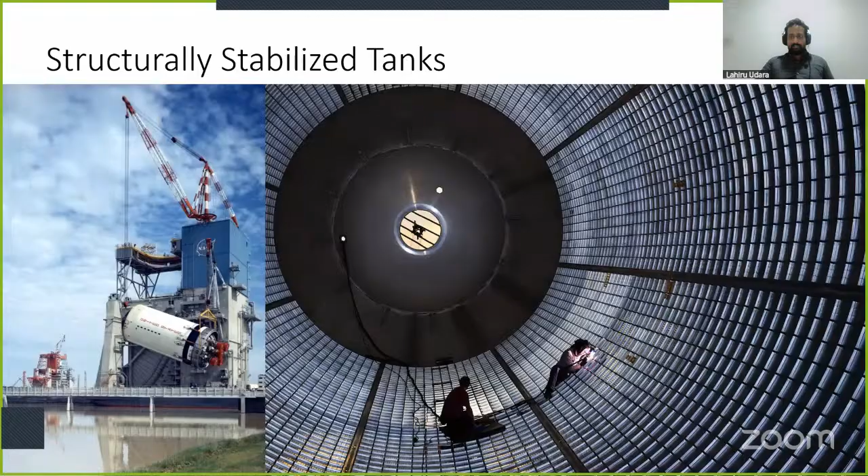When it comes to tanks, there are two main types. The first one is called the structurally stabilized tank. This means the structure of the rocket is strong enough to hold the entire tank. You might wonder, if the tank cannot hold itself together, wouldn't it collapse on itself? Yeah, it happens. That's why it is structurally stabilized.

This means the inner side of the tank is made in a way to increase its strength. For example, this rocket stage has these square, rectangular shaped components cut out from the skin, so it has this orthogrid structure - this is called the orthogrid. And that gives the strength for the tank.

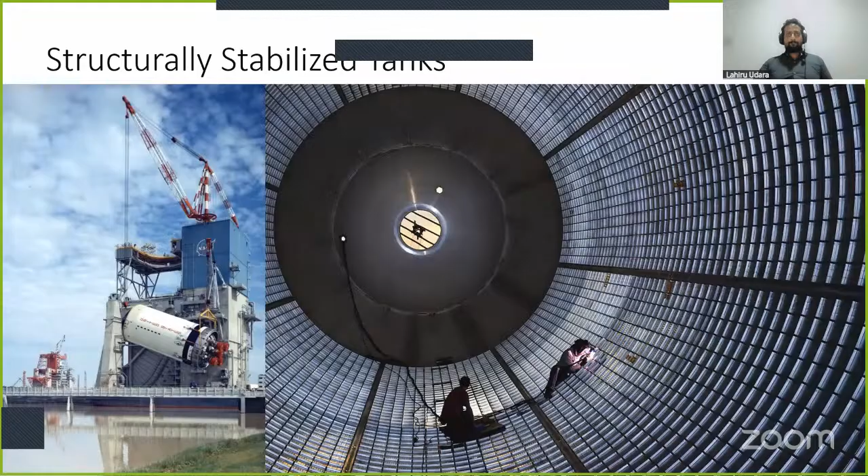The other type is called the pressure stabilized tank, which means the structure of the tank is not strong enough to hold the tank together. So that means if these tanks are not pressurized, they will collapse.

So yeah, that's what happens if you lose the internal pressure on a pressure stabilized tank.

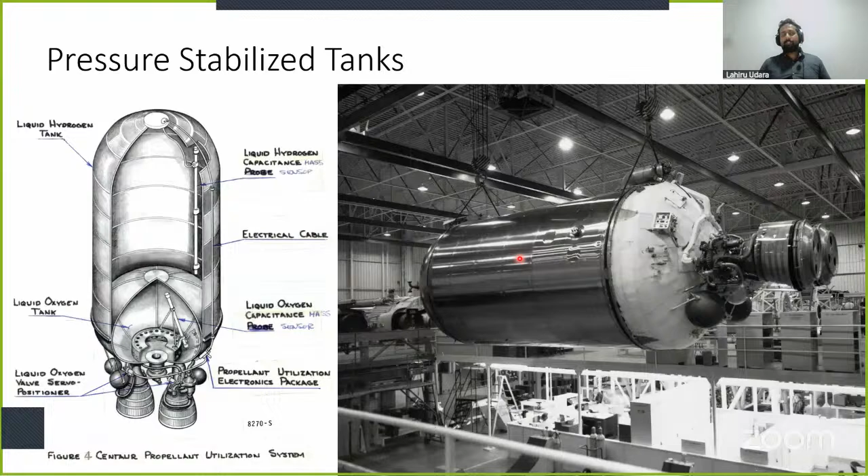So one of the clever tricks is this: you just take a very thin sheet of metal and make a tank out of that sheet. So this is basically a sheet metal tank. It's very thin, so it doesn't have enough strength to hold itself together, and you need to pressurize it to make it like a balloon. So these are called balloon tanks, because if you pump air into a balloon, it can lift something up, but if you remove the pressure, it just collapses on itself.

So both of these tanks are used on rockets. Then there's tank pressurization. Pressurization is crucial for pressure stabilized tanks, but structurally stabilized tanks also need tank pressurization. That is because before launch, the rocket tanks are basically filled with propellants.

But as you go up, the level of propellants reduces. That means initially you had higher pressure for the engines, like the liquid pressure is proportional to the height of the liquid. So when the tank is full, you have a lot of pressure at the bottom of the tank, which means you have a high inlet pressure for the rocket engine.

As the level of the propellant goes down, the pressure reduces. That is not good because you need to maintain a constant pressure for the rocket engine inlet. So to keep up with the loss of propellant, you need to increase the pressure above the liquid, using a gas like helium, which is non-reactive. You pump helium to the top of the tank as the propellant level goes down, so in that way you can keep almost constant pressure near the engine inlet.

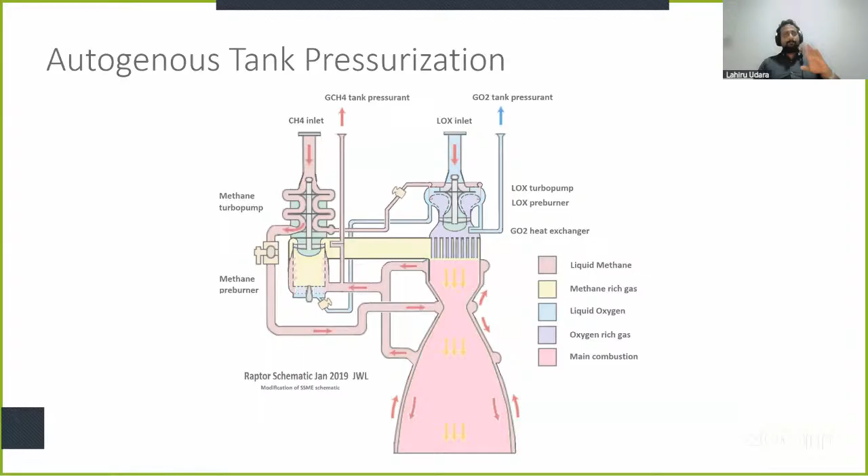Imagine the rocket is going to space. The first stage engine was shut down and removed. Now it's time to ignite the second stage engine, but now you are floating in space, so the liquid just floats inside the tank. You cannot start the engine because you don't have liquid at the inlet of the rocket engine. If you start it that way, you're not getting liquid into the tank, so your pumps rotate at a much higher speed and will just explode. This is not good.

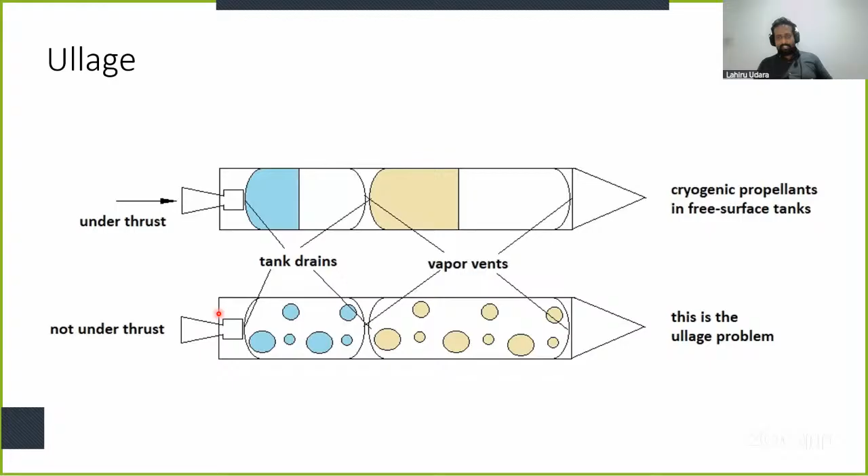You need to get these liquid bubbles back into the bottom of the tank. So how do you do that? You need small rocket engines called ullage thrusters - this process is known as ullage. Ullage thrusters, basically small rocket engines, just fire, giving a small acceleration, which pushes those liquid bubbles back into the bottom of the tank. Now you can start the rocket engine.

If you watch a rocket launch, let's say a SpaceX Falcon 9 launch, you can clearly see these ullage thrusters are fired just before the ignition of the second stage. You can watch a video on YouTube and you'll see that.

Now, multi-stage rockets. Modern rockets have multiple stages. The reason is that you can remove weight as you go up, so it will be much more efficient. Otherwise, if you are doing a single stage rocket from the ground all the way to orbit, it has to be a very big rocket. But you can do a multi-stage rocket and carry that same payload in a much smaller rocket. So this is a weight efficient method.

This is a Delta II rocket. It has the first stage with 9 rocket boosters, then the second stage and the third stage, and the payload here, which is the Kepler Space Telescope.

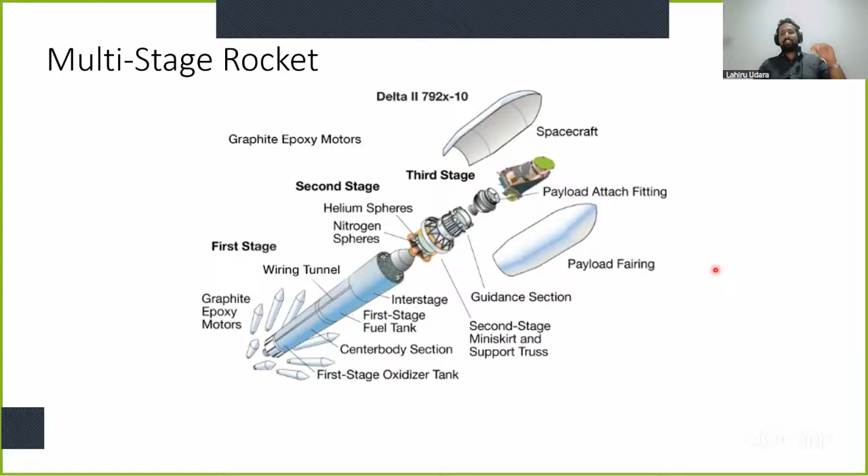Now we are going to talk about how a rocket is manufactured. We are diving into a rocket manufacturing facility. Everything starts with metal sheets - these are aluminum sheets. Most rockets are made out of aluminum alloys. The main reason is aluminum is very lightweight and has good strength.

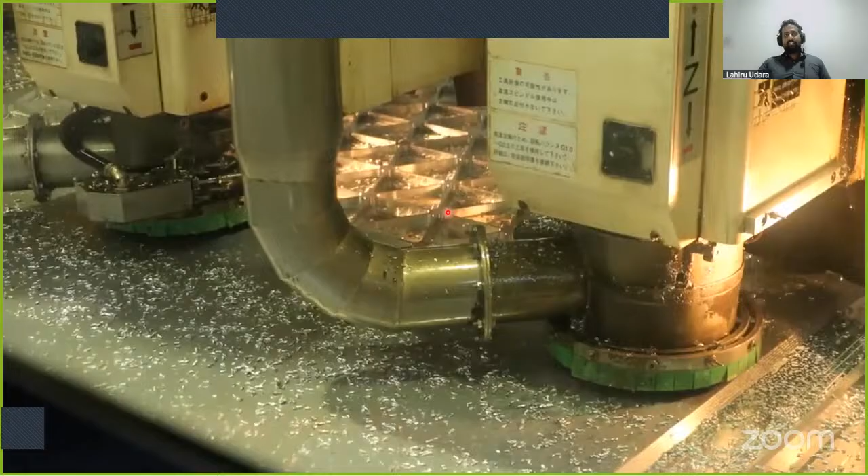Relative to its weight. But you cannot take this bulky metal sheet for the rocket - you need to cut down some weight. To do that, you take a milling machine and start to cut different shapes. Earlier we saw a rocket with rectangular cuts, called orthogrid. Here you can see triangular cuts - the center parts are milled away. This is called a milling machine. It's basically a kind of drilling machine, but the purpose is not to drill a hole, it just moves around, removing the material.

By doing this, you can reduce your weight by a large margin while keeping most of its strength. That's why most rockets have this kind of milling pattern. This is called the isogrid. The previous rectangular blocks are called the orthogrids. So these two patterns are used when manufacturing a rocket tank.

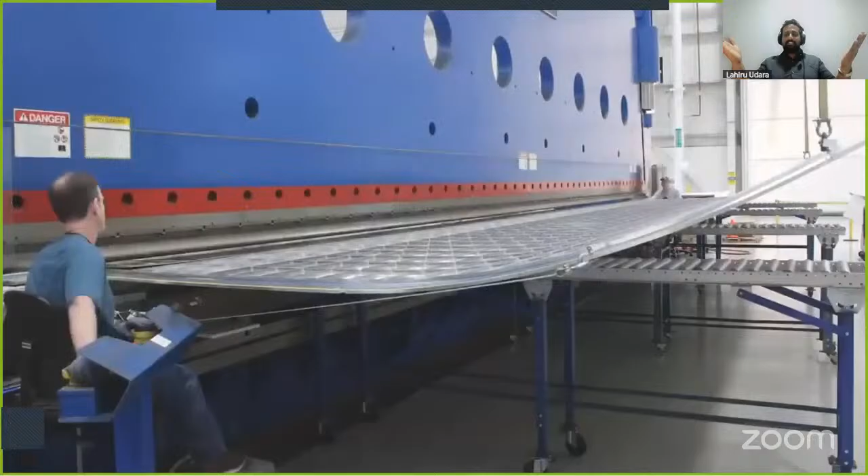Then we have this - you can see the milling part is done. Next thing is you need to bend this long sheet into a curve, because you need to attach multiple curved sheets to make a cylinder. So these are the welded lines.

Most modern day rocket manufacturers use friction stir welding to weld these parts to make a barrel. These are called barrels. To get the appropriate height, you can attach multiple cylinder barrels to get the appropriate height of the rocket stage.

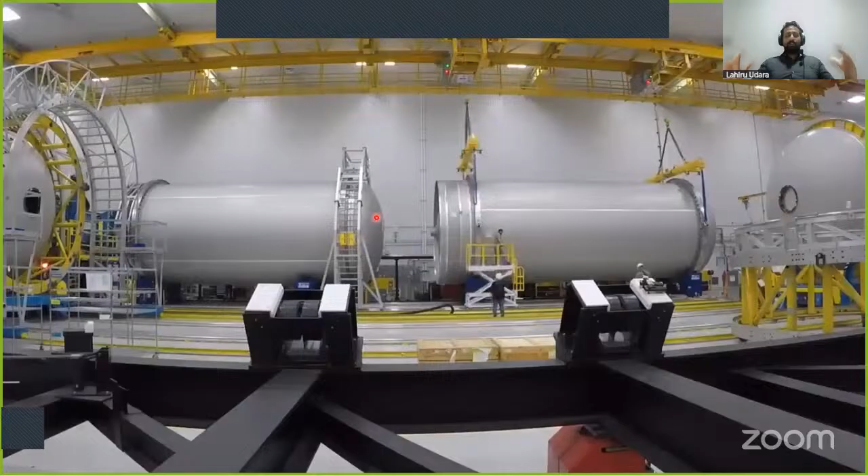Here we have two completed tanks. Then you have to attach these two tanks to make the whole stage. After that, you need to attach rocket engines, electrical wirings, computers, and all these other components.

Then you have to send these to the launch pad, because most of the time rockets are not manufactured near the launch pad. There are multiple reasons for that, but for transporting, we have multiple methods. One method is you can use a big ship and use the ocean or any waterway to transport these big rocket stages.

The reason for that is the maximum size for anything allowed to be transported through roads in America. So Falcon 9 was manufactured keeping that idea in mind, so we don't need big ships or aircraft to transport our rockets. In order to transport these on the main roads, we need to limit the size of the rocket to 3.7 meters - that is the diameter of the Falcon 9 rocket.

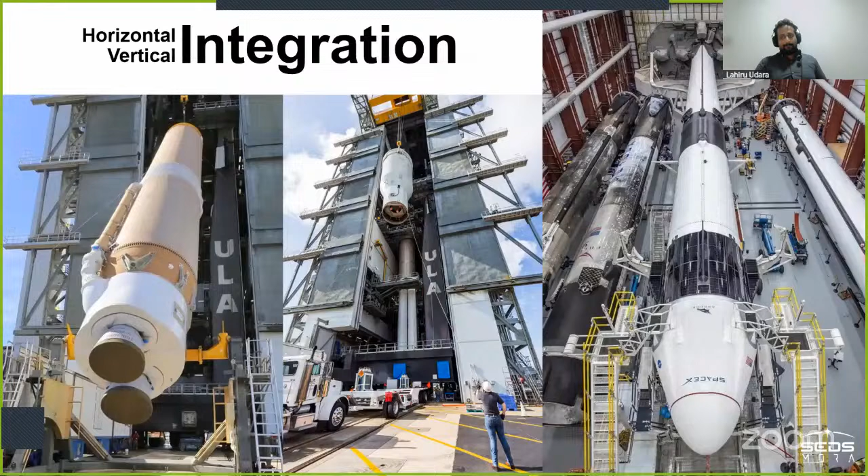Once all the stages are delivered to the launch pad, next thing is called integration. There are two methods: one is horizontal integration, the other is vertical integration. These things explain themselves - horizontal integration means you are assembling the rocket in a horizontal way, and vertical integration means you are assembling the rocket in a vertical way.

So that's basically it. This is the Falcon integration facility. You can see 4 first stages here, and this one has been integrated with the second stage and the Dragon spacecraft onto the launch platform. Here you can see the launch platform.

And here ULA, United Launch Alliance Company, used vertical integration. The first stage, you can see, has been transported onto the launch platform here. Then the second stage is hoisted and placed on top of that.

Then the payload. One of the main reasons is some payloads cannot be integrated horizontally, like a very delicate thing such as a space telescope. If you are using horizontal integration, you have to transport it to the launch pad in a horizontal way, then raise it up and turn it 90 degrees. Some delicate instruments on a space telescope might not be designed to withstand that, so in these cases vertical integration is the best - that's why the 2 companies use 2 different methods.

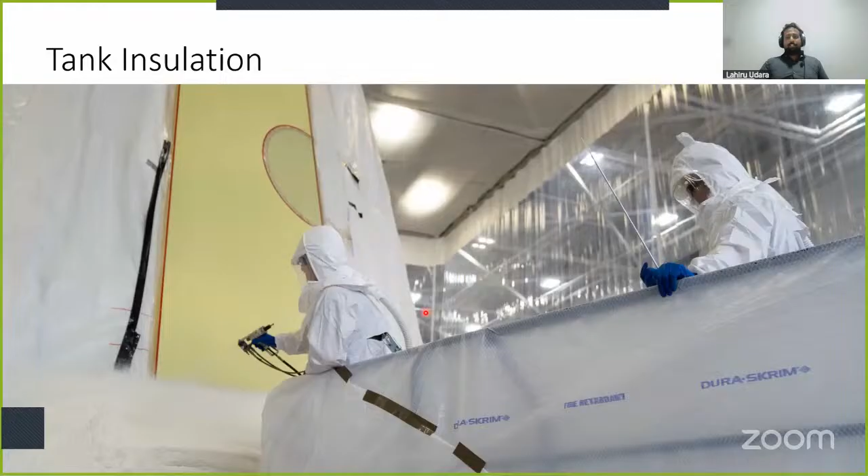Another thing I need to mention about tanks is the insulation of the tank. Most rockets use cryogenic propellants, meaning these liquids are gases at room temperature. For example, liquid oxygen is used as an oxidizer, but oxygen is a gas at room temperature. You need to cool it down to minus 183 degrees Celsius to make it a liquid. But once you fill that cold liquid into a tank, the outside of the rocket is at normal environment temperature. The heat will come into the tank and start to vaporize that liquid again. So to prevent that, you need to add thermal insulation around the rocket tanks.

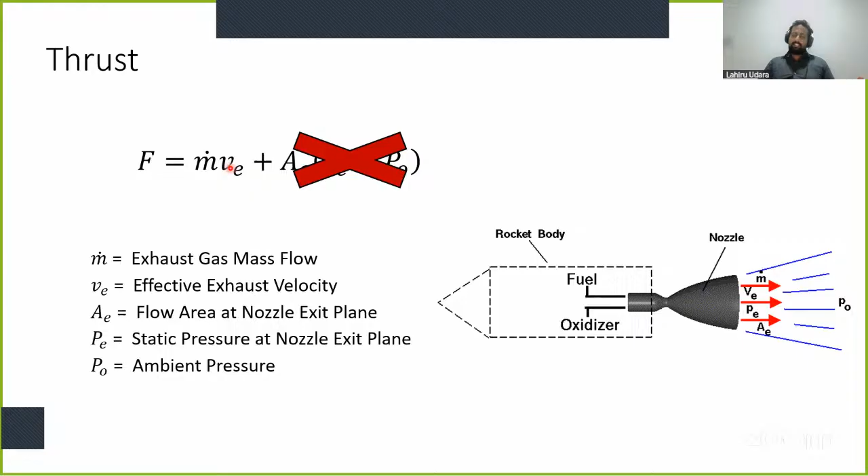When it comes to rocket engines, we have two key metrics: one is the thrust, the other is the efficiency. In normal vehicles we use kilometers per liter — for a bus it's like 5 kilometers per liter, for a car it could be 20 kilometers per liter.

But for rocket engines, we use a different metric to measure efficiency, called specific impulse. Impulse means force multiplied by time. Specific means you divide it by the mass flow rate or mass. Rearranging m dot v, since m dot equals m divided by t, you get ISP, or specific impulse, equal to the exhaust velocity. In simple terms, the higher the exhaust velocity of a rocket engine, the better the efficiency.

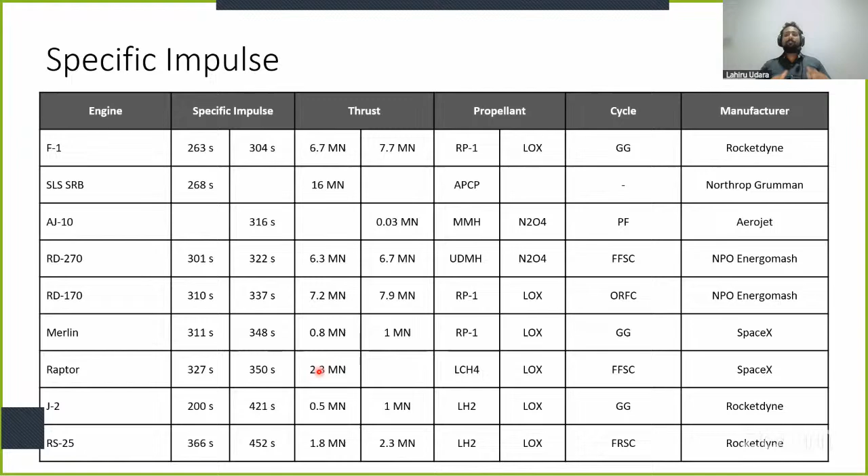Then another basic thing: liquid rocket propellants versus solid rocket propellants. If you're using liquid rocket propellants, your rocket engine could be shut down and restarted because it's liquid, and you can throttle the engine, like change the thrust, and liquids tend to have a higher specific impulse. But a liquid rocket engine is much more complex, with valves, turbines, pumps, etc.

And most of the rocket propellants we have that are not toxic are cryogenics. For example, liquid hydrogen, liquid oxygen, liquid methane. These are cryogenic propellants, which means you have to cool those down.

There are some storable propellants, meaning liquids at room temperature, but those are really toxic. For example, monomethyl hydrazine and dinitrogen tetroxide are both liquid at room temperature, but much more toxic. It's not good for people.

And also liquid has a lower density compared to solids. Of course, liquid has a lower density compared to solid.

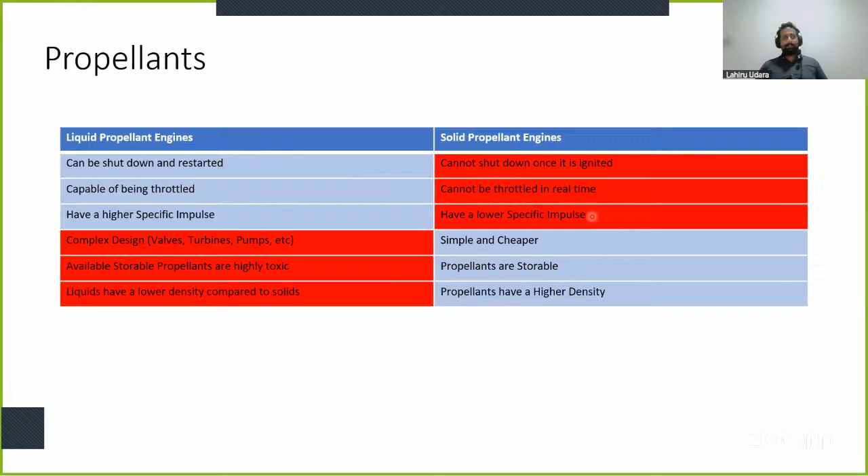So then there's some other stuff. Usually when we talk about rocket propellant, we talk about fuel and oxidizer—you have two components. Those are called bipropellants. And there are some other propellants called monopropellants, meaning you don't have fuel and oxidizer, it's just the same one liquid.

So since there's no oxidizer here, there's no combustion. What you do with something like hydrogen peroxide is basically decompose it into gases—you take hydrogen peroxide and decompose it into oxygen and water vapor. So it's kind of a rocket engine, but it is less efficient compared to a bipropellant rocket engine, which has burning or combustion inside the rocket engine.

Another thing I want to quickly mention: in A-level chemistry class, you should have learned about stoichiometric ratio, the correct ratio in a chemical reaction. For example, if you take hydrogen and oxygen, you can make water, but to balance the equation, you need two hydrogens with oxygen to make two water molecules.

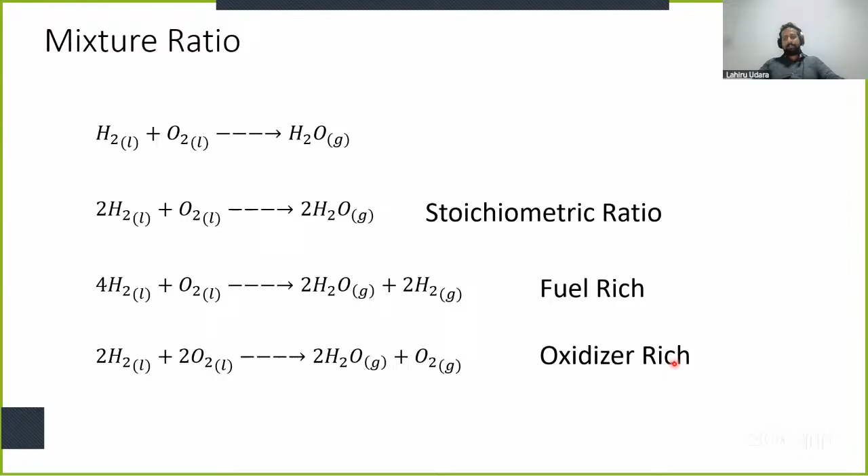For example, for a liquid hydrogen, liquid oxygen combustion, the proper mixture ratio is around 5.5, between 5 and 6. For kerosene, you have 2 point something, and for methane you have 3 point something. So we have different mixture ratios, but you might think, okay, we need to get as much specific impulse out of the rocket engine as possible. Yes, theoretically, we need to get as much energy, as much specific impulse, from the rocket engine.

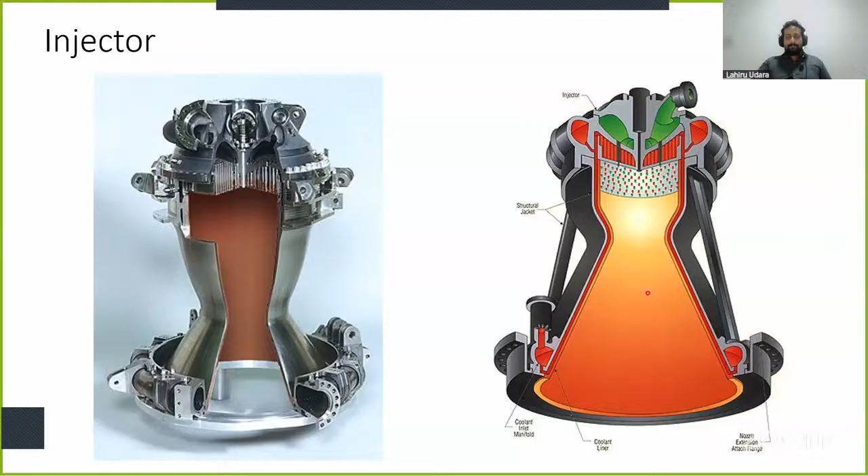You might think, oh, it's very simple - you have one hole for the fuel, then one hole for the oxygen, and it just combusts. That's it. But it doesn't work like that.

For example, this is the injector plate of the F1 rocket engine. You can see there are a lot of holes, and these holes are angled in a way so two streams will hit each other - that's why they're inclined, angled. These are not straight holes into the plate; all of them are inclined holes. There are thousands of holes in this injector plate at a very specific angle.

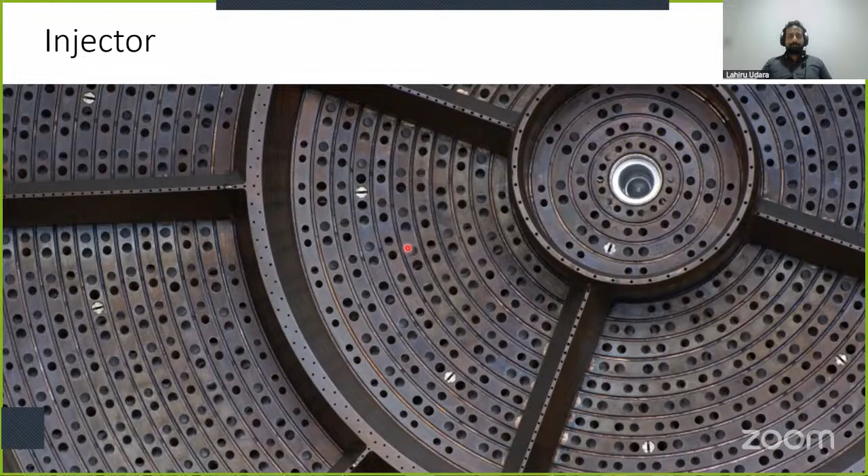The other thing is, one set of holes have fuel and the other set of holes have oxygen. So the backside of the injector plate is very complex, to get one set of holes to have oxidizer and the other set to have the propellant.

This is like the simplest way of an injector. You have fuel coming at an angle and you are injecting the oxidizer straight, so everything hits at one point and mixes. Without proper mixing, you cannot get good combustion. Here you can see how these are made - we have these big center holes and the other two are inclined holes.

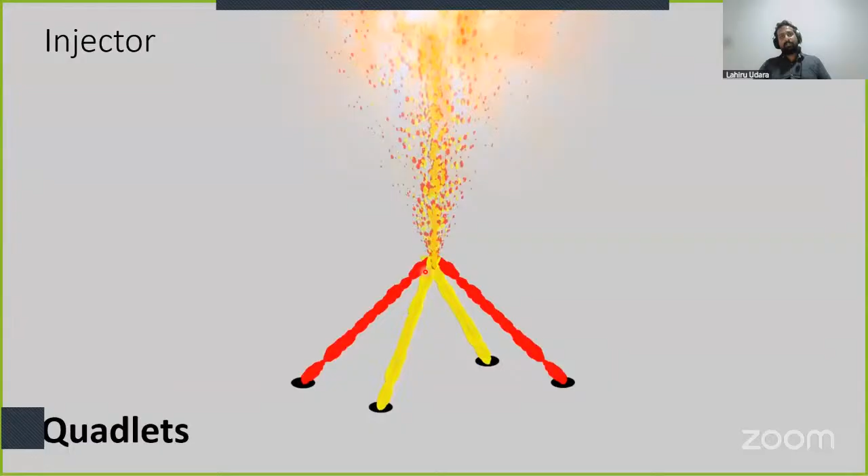Those are called triplets because they have 3 holes. Now we have quadlets, with 4 holes, 2 shooting fuel and 2 shooting the oxidizer.

Then there's the other fuel injector type, a small cylinder where 2 streams enter at the bottom in offset positions, creating a rotating effect, and once it reaches the top it just sprays out. It's a very efficient way.

In the same way, you can have a central cylinder and an annular hole. These are called coaxial fuel injectors. All of these are used to make a proper mixture.

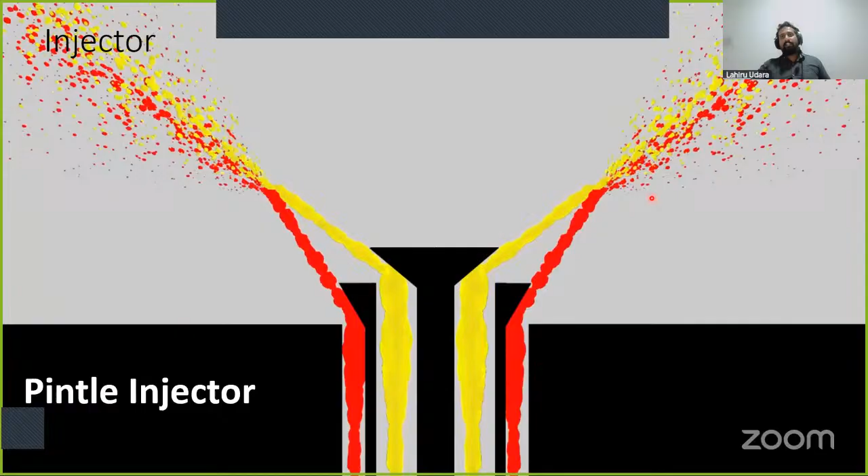Without good mixing of fuel and oxidizer, you cannot have good combustion. This is a very simple one, called the pintle injector. Everything I mentioned before has a lot of holes on the injector plate, maybe thousands, but the pintle injector is a simple single injector. Here you can see how it works - these inject at an angle and those inject at a different angle, so it hits somewhere. This is a real pintle injector.

Here you can see these propellants - this is actually water for testing. The liquids are shot out in a radial way, and another one shoots the other propellant in an axial way, and both collide causing a really good mixture. This pintle injector only has one injector compared to the triplets, quadlets, and coaxial swirl injectors. It's kind of a simple way. These are used on Merlin engines on the Falcon 9 rocket.

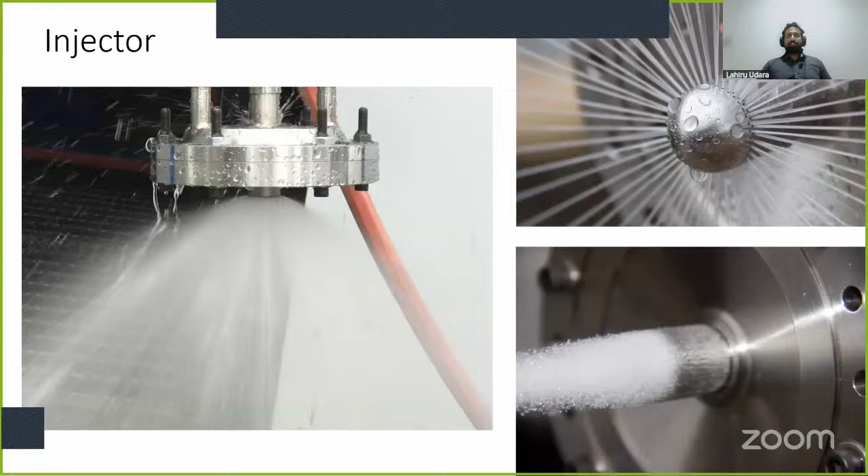The reason I explained about injectors is that injector technology is considered a secret of a company, because the performance of the rocket depends on the injector. If you don't get a proper mixture, you don't get proper combustion. If you search for injector plates on rocket engines in America, you cannot get the current version of the injector plate - these are considered secrets. You can see old injector plates, like the F1 engine from Saturn V, but you cannot get a clear image of a modern injector plate because it's a secret for almost all rocket companies, since it's a very crucial part of a rocket engine.

Okay, I have a question for everyone. Can anyone identify this rocket engine? Does anyone know the name of this rocket engine? It's kind of a popular rocket engine actually. If you know this, just type in the chat and say the name.

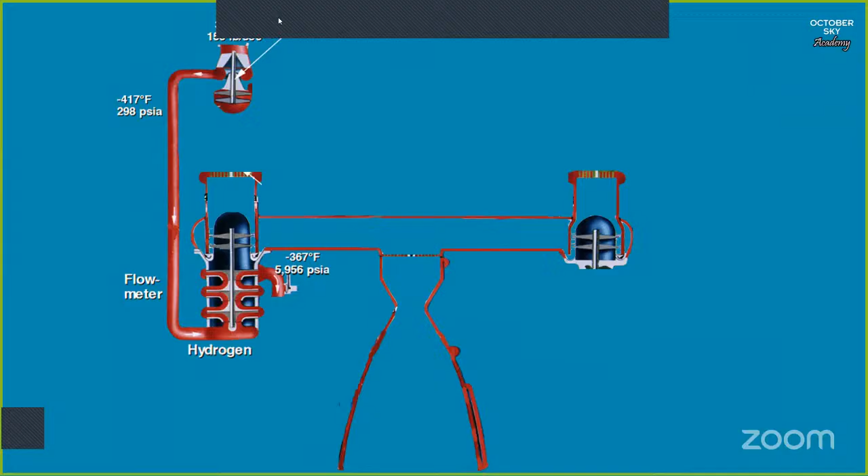We can use these to cool the combustion chamber, because when the rocket is working, we have combustion happening here and hot gas coming out from the nozzle. So everything here is very hot, like thousands of degrees Fahrenheit. So we need to cool that, otherwise it would melt.

So we are pumping this high pressure cold liquid hydrogen through some channels, some paths made inside the nozzle and the combustion chamber. This cold propellant flows through the walls of the nozzle and combustion chamber, so it cools down the engine basically.

After the cooling, as it absorbs the heat, the temperature has risen to minus 193 degrees Fahrenheit. So now we get this relatively warm liquid, and we divide the channel to two sides: one to the fuel side and the other to the oxidizer side.

Another small part of this propellant is used to drive the turbine here, because a pump cannot work automatically, you need to rotate it. To rotate the pump you use a turbine. So this is a pump, this is a turbine. When the hydrogen flows through the turbine, it rotates and it will rotate the pump. That's how the pump works.

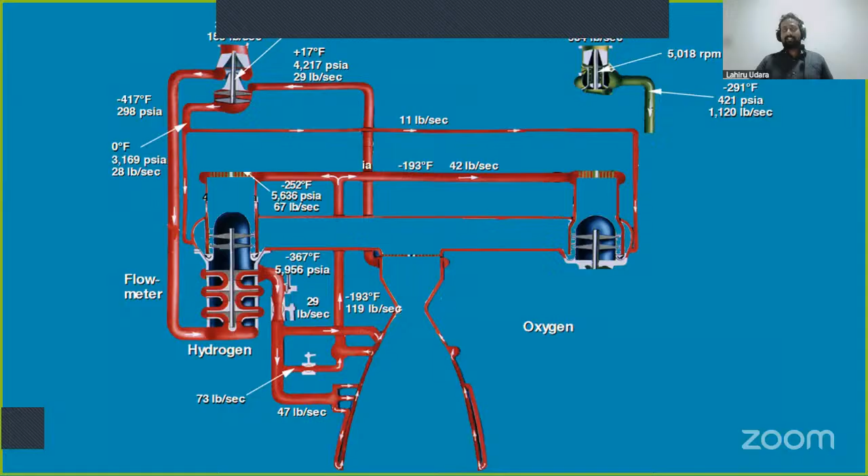Now let's move on to the oxidizer side. As with the fuel side, we have a low pressure oxidizer pump. We have 100 psi, that's the inlet pressure. It is increased to 421 psi, and it's very cold liquid oxygen.

Then it goes to the high pressure oxidizer pump, so it's now 4,000 psi. Then we just pump most of the oxidizer into the main combustion chamber. The small part of this high pressure oxygen is used to rotate the low pressure oxidizer pump, that's how the low pressure pump works.

And we take a small portion of the oxygen and use another set of pump here. It's a very small pump because we're taking a small part. For example, we're taking 1000 pounds per second of liquid oxygen, and 839 pounds of that propellant is injected into the combustion chamber, some part goes to rotate the pump, and the remaining 92 pounds per second flow is directed to this small boost pump and increases the pressure to 6,939 psi. These are injected to here and here. That's the highest pressure in the rocket engine.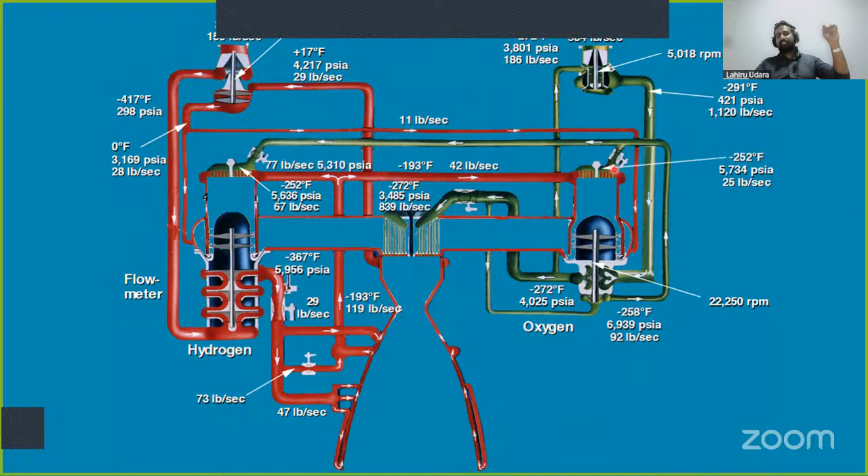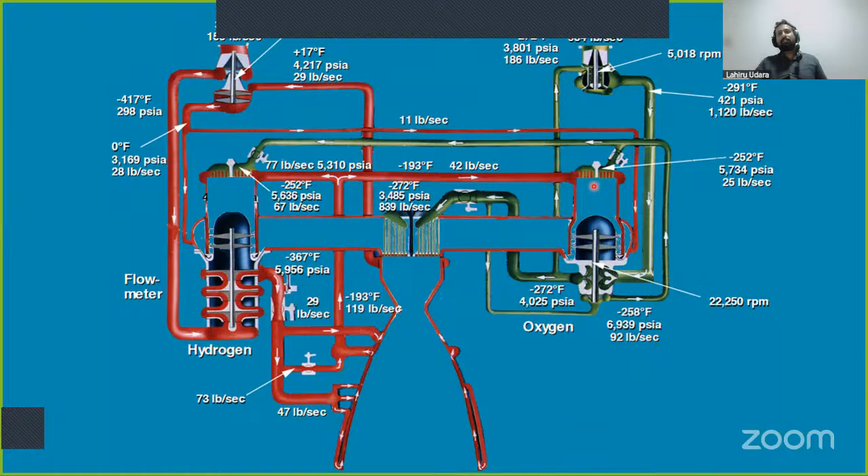You can read the numbers. You can see we have fuel coming to here and here, then we have oxygen coming to here and here. These are called pre-burners, this is the fuel pre-burner, this is the oxidizer pre-burner. So what it does is basically combust.

Now here's the fun part. Not all, but most of the fuel is pumped into the pre-burners here and here, only a very small part was pumped to here. You saw that on the oxidizer side, most of the oxidizer was directly pumped into the combustion chamber, only a small part was pumped into pre-burners.

Remember the mixture ratio: you have a lot of hydrogen, a lot of fuel, and a very small amount of oxygen for combustion. So now we have a fuel-rich combustion. You have a lot of hydrogen, a small portion of oxygen, so only a small portion of hydrogen would burn, relative to how much oxygen you're getting. The rest of the liquid hydrogen doesn't burn because you don't have enough oxygen, since most of the oxygen is here in the main combustion chamber.

Because of the combustion, remaining hydrogen is converted to gas. So now you have hydrogen gas and the combustion byproduct. That hot gas is used to turn these turbines, which turn the high pressure oxidizer pump, oxidizer boost pump, and high pressure fuel pump. That's how you get these pumps to work from the gas from the pre-burners.

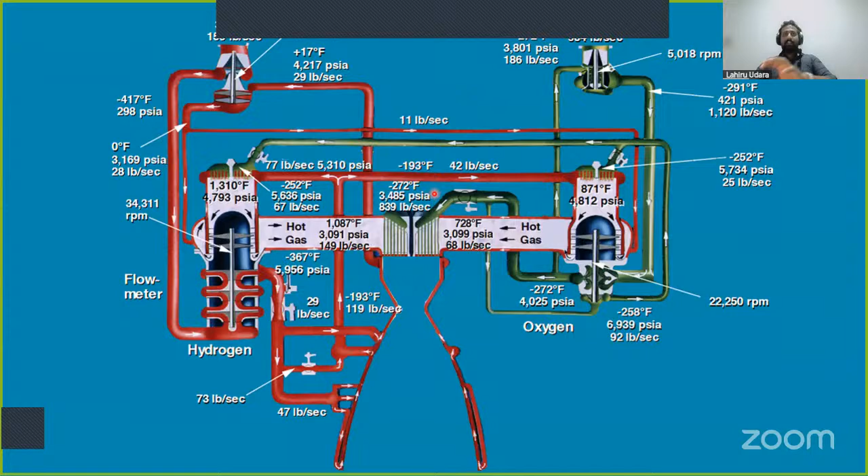After that, hot gas from both pre-burners is injected into the main combustion chamber. So now you have a lot of unburned hydrogen gas and liquid oxygen from the pump, and you combust them together for the main stage combustion. In the main combustion chamber, you are burning as close to the optimum stoichiometric ratio, so you get 6000 degrees Fahrenheit.

But in the pre-burners, you burn in a fuel-rich ratio, so you only get around 1000 degrees Fahrenheit. I told you earlier, you get the maximum temperature at the stoichiometric ratio. If you are doing a fuel-rich or oxidizer-rich burn, you're getting a much smaller combustion.

So this is how the RS-25 rocket engine works. Most rocket engines work in a similar way, not exactly the same, but most have pumps, turbines, and everything, just in different configurations. We call these cycles of rocket engines. We have the gas generator cycle, and we have stage combustion, which here we call fuel-rich stage combustion — meaning you are burning fuel-rich in the pre-burner.

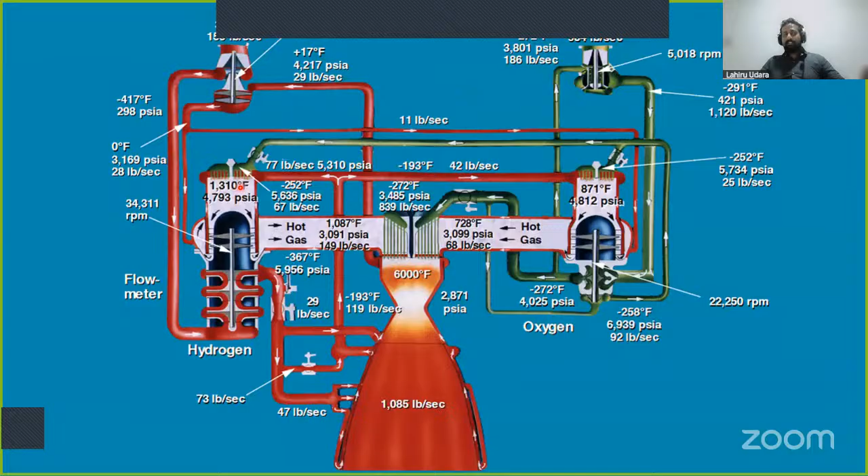Then we have the other variant, which is oxidizer-rich combustion, meaning you are burning an oxidizer-rich ratio in the pre-burner. Then we have full flow stage combustion, meaning you are burning most of the propellants, both fuel and oxidizer, in both pre-burners. So there are multiple types of cycles — you can read about this on the internet, it's not that complicated.

So this is fuel-rich stage combustion, one of the most complicated rocket engine cycles. I think now you get the idea how everything here works. We also have some other components for autogenous pressurization, vibration management, and everything — those are the other lines. That's how the RS-25 rocket engine works.

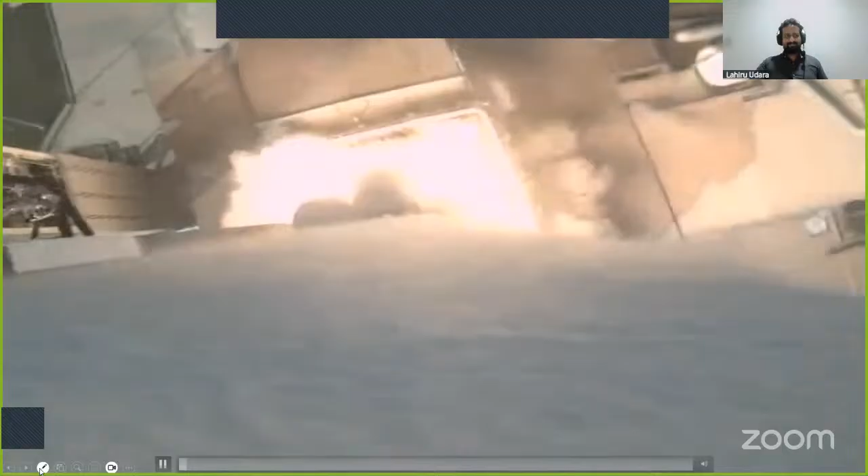Okay, so this is from the Atlas V rocket launch.

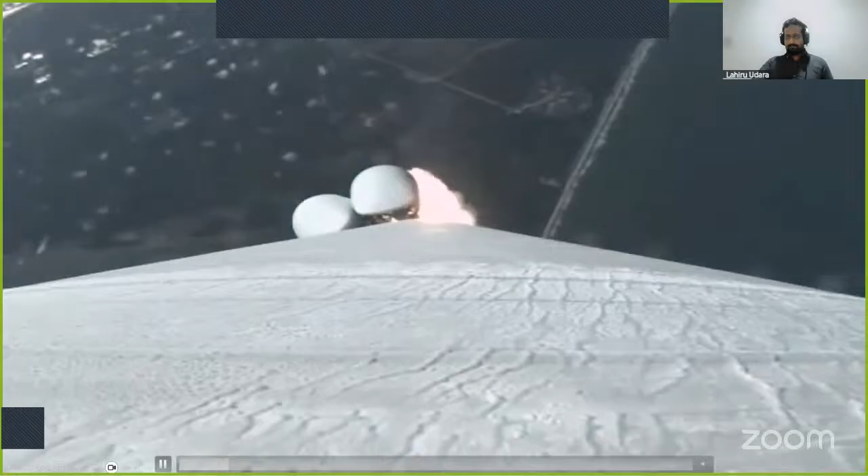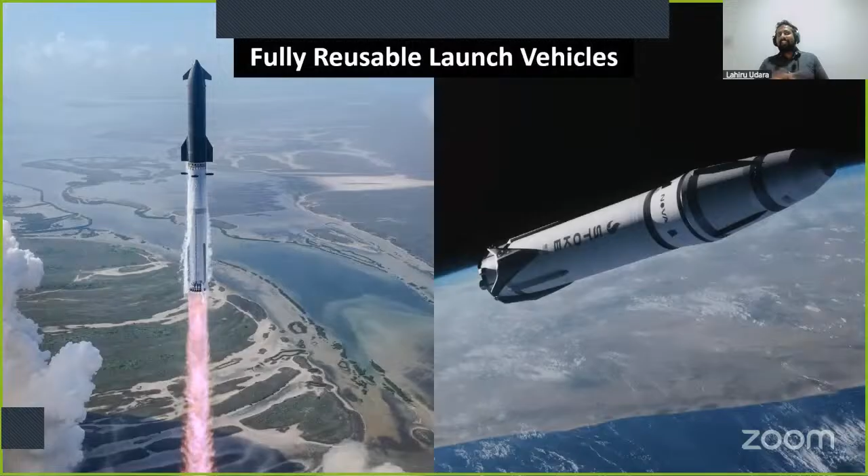If you guys don't have questions, we can move on to the next section — modern rocket innovations and the future of space travel. Up until now, I talked about general stuff about rockets, but now we have a few specific points to talk about. So in today's world, what is happening with rockets? I want you guys to engage with me here. Currently there's a lot happening in the space industry with rocket innovations, and one of the coolest things, I guess, is the development of fully reusable rockets or fully reusable launch vehicles.

Currently we have two private companies working on fully reusable rockets. One is obviously SpaceX, with Starship — this is from the latest flight, the 12th flight of the Starship. The other one is Stoke Space, another company in America, and they are building a rocket called Nova.

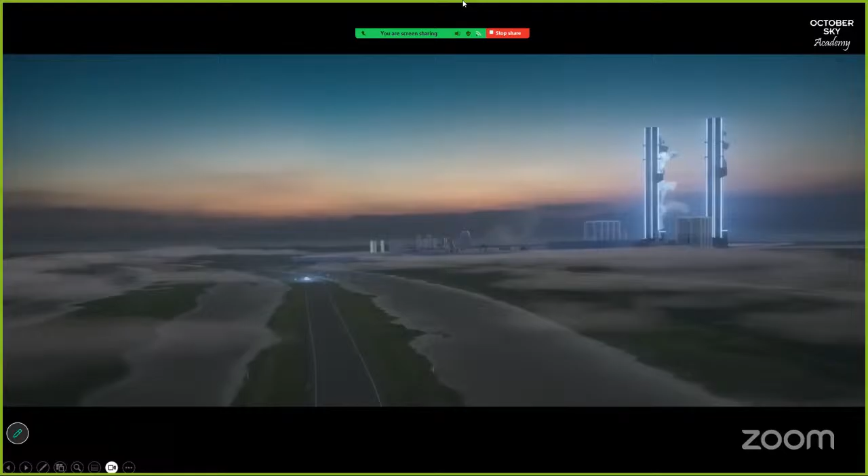Let's dive into both rockets. I think you guys know about Starship anyway, but I will talk about it anyway. So Starship is basically the largest rocket humans have ever built, and it is 120 meters in height and 9 meters in diameter. It's made out of stainless steel, not aluminium.

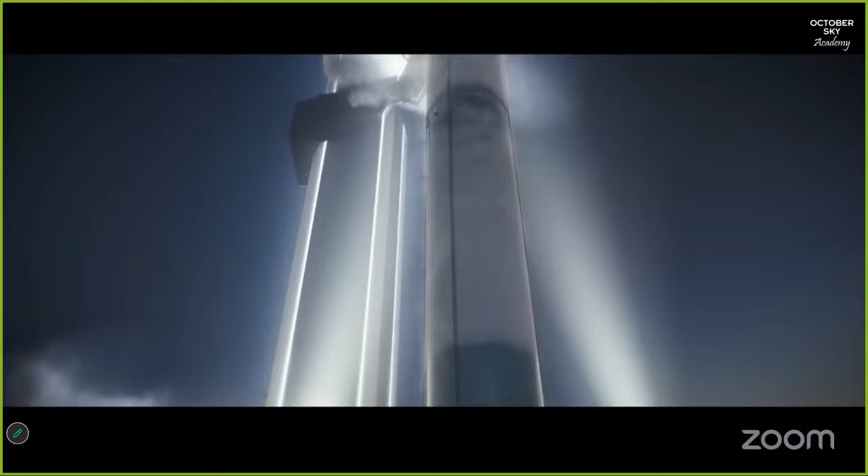The key difference is this two-stage rocket is designed in a way that both stages can be reused. That means you are not only landing the first stage, but also landing the second stage. We have all seen first stage landings.

We have Falcon 9, Falcon Heavy, New Glenn, and over in China we have ZQ-3, Tianlong 3, which is not yet successful, but also Long March 12A. So there are a lot of rockets that have the capability to land the first stage.

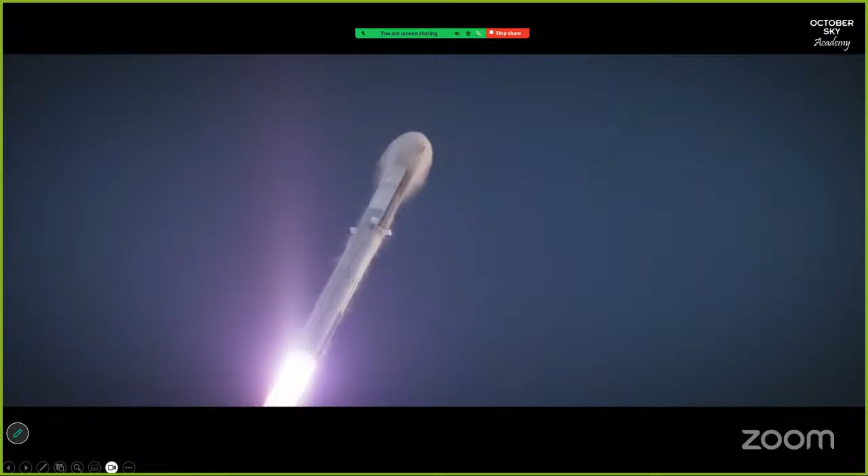But landing the second stage is much more challenging because the second stage is the one that carries the payload to its intended target or orbit. That means if you are in low Earth orbit, the second stage is traveling at orbital velocity. The first stage is usually separated at much lower velocity, like 8,000 to 10,000 kilometers per hour — relatively slow, so it's relatively easier for it to land.

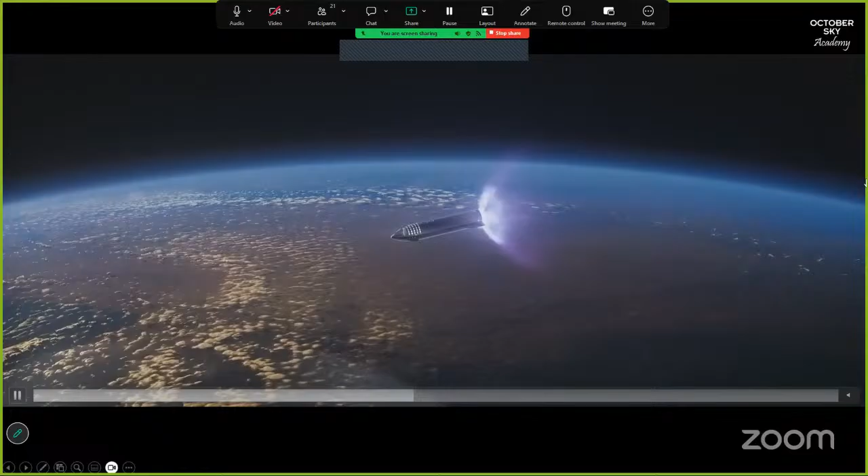But the second stage is going at orbit velocities, which is like 28,000 kilometers per hour or higher. So when you are coming to Earth at that speed, there's a lot of heat generated at atmospheric entry. So you have to have a heat shield and everything as a spacecraft comes down to landing.

In Starship, it only has fuel to reach low Earth orbit. But the Starship is designed to go to Mars. In order to do that, it has to be refueled in orbit. So this is orbital refueling.

So you have one Starship carrying the propellant and the other Starship has humans or cargo or anything. The tanker Starship refills the human or cargo Starship in orbit. After the refilling, the Starship can reignite its rocket engines and go to Moon, Mars, or wherever it's going.

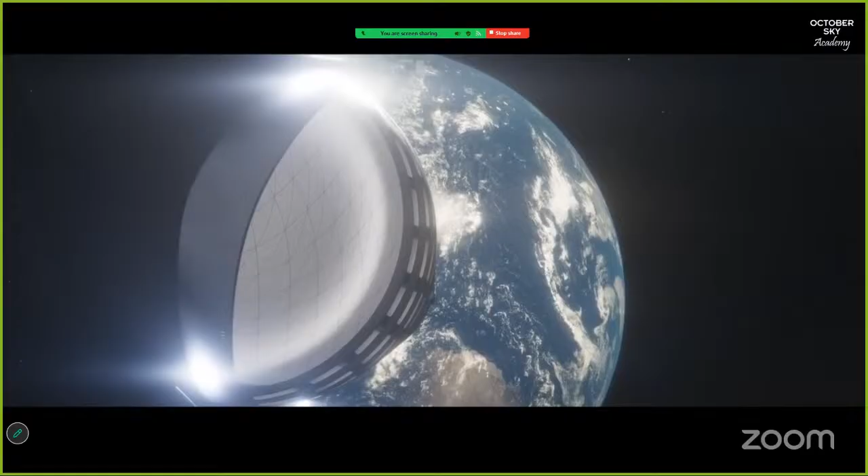So without orbital refueling, Starship is stuck to low Earth orbit, like the space shuttle.

So currently Starship is under development, meaning SpaceX is testing the Starship. Right now they have their third variation, which they call the third generation, or V3. They had the first launch of the Starship V3 back in the last week of May. So it's just a few weeks ago.

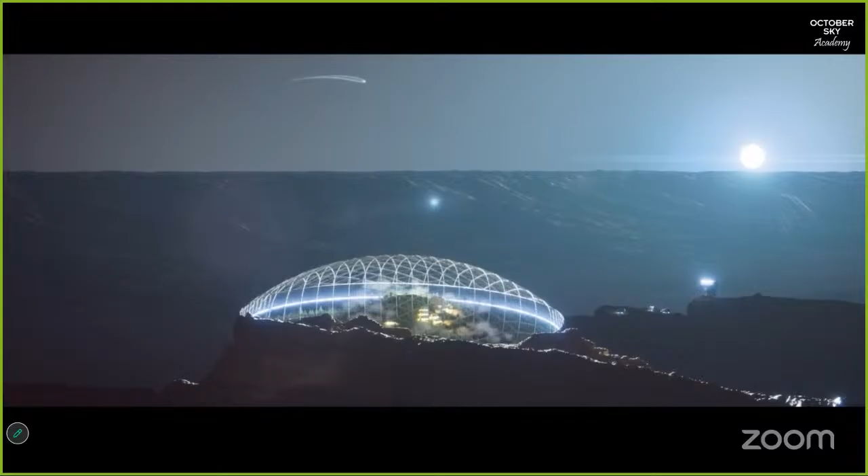So the flight was mostly successful. The first stage was able to push the second stage into its intended orbit, but the boost-back burn and landing failed for the first stage. The second stage also had engine failure, but regardless of that, it was able to land. So that is a good thing.

So the ultimate goal of SpaceX is to send Starship to Mars and build a colony on Mars. That's in the distant future, I guess. Right now, Starship is still in the testing phase. A city on Mars, that's a good dream for this century, I guess.

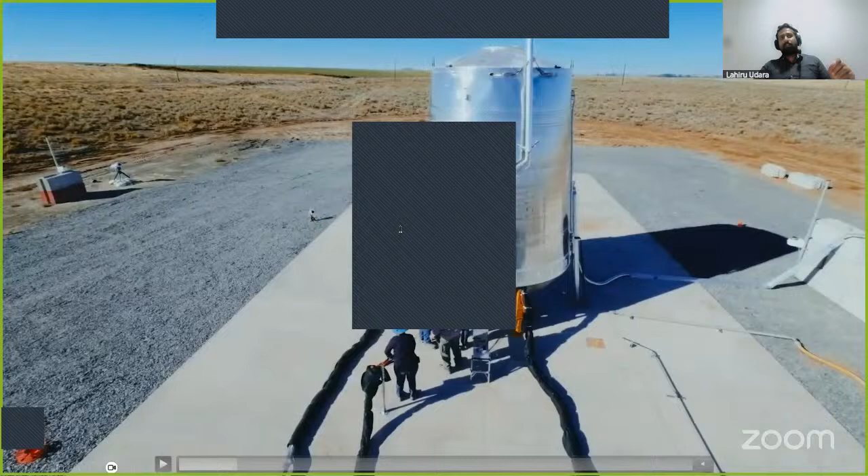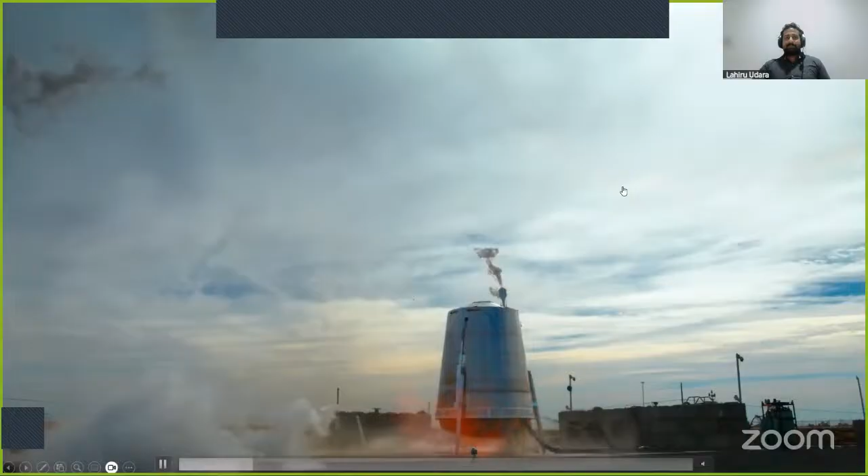This is actually kind of a hop, a very short flight of that second stage. One of the things you need to note is you cannot see a clear rocket exhaust here. So this is not the rocket exhaust. You can see kind of a flame, but it's not like a rocket engine exhaust.

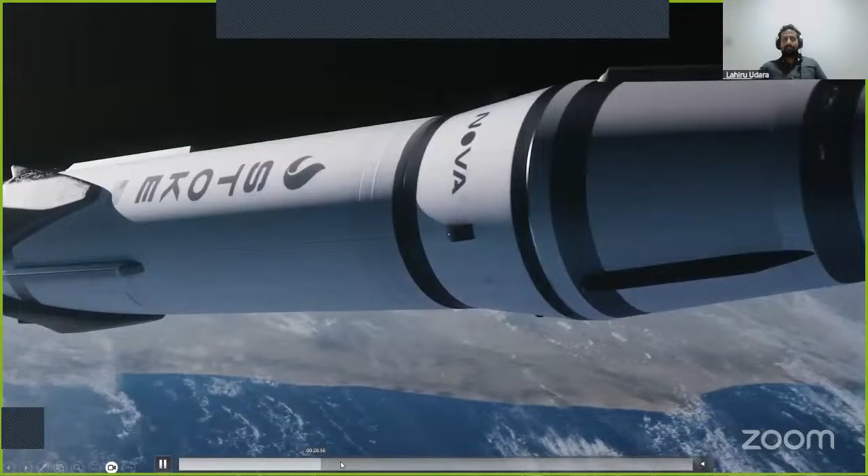If you can see, the rocket engines are at this circumference, like there are multiple rocket engines around the circumference. It's not very visible here, but in this animation you can see that. So after the first stage separation, the rocket engines are basically around the circumference here, and the center part is the heat shield.

On the Starship, the heat shield is on the side of the Starship. But on the Nova rocket second stage, the heat shield is at the bottom of the second stage. So that's a key difference.

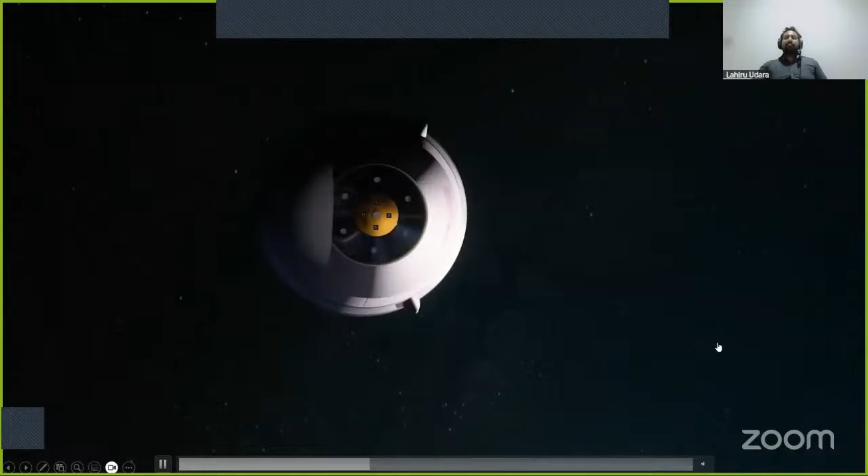So this one also needs orbital refueling. One second stage can refuel the other second stage, which will allow the second stage to go to higher orbits or even to the Moon.

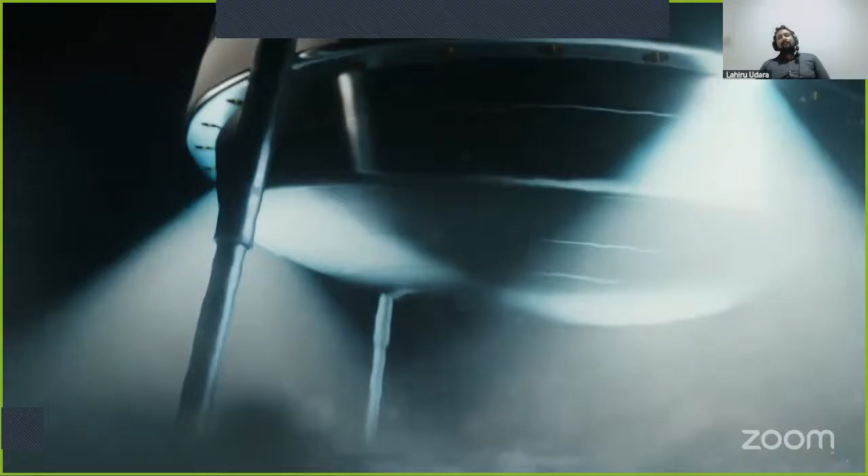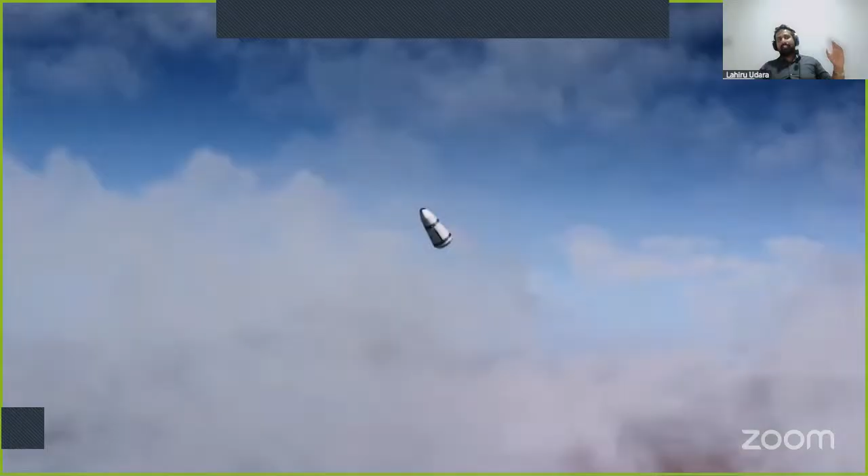So yeah, they are also aiming for the Moon. They can also use this reusable second stage to capture things like dead satellites and orbital debris, and then here's the cool part: it just re-enters the atmosphere like a space capsule and reignites the rocket engines for landing.

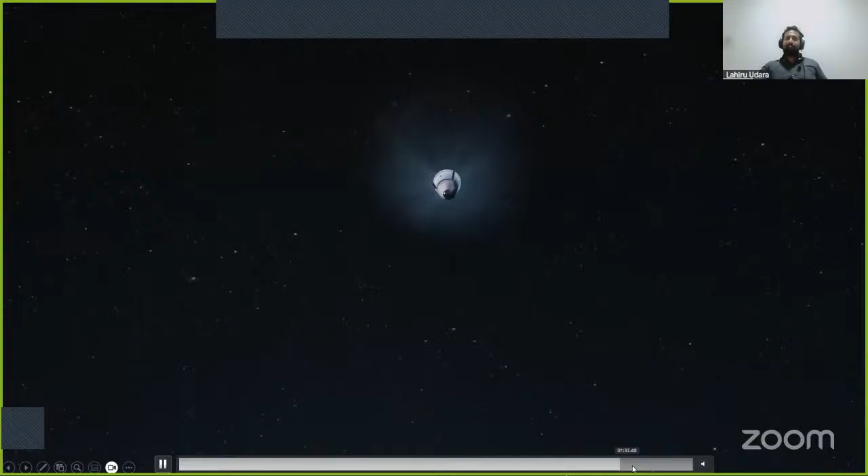That's their target. Currently, they have tested their second stage like this. If you remember, SpaceX also tested their second stage first, back in 2020-21. Now they have the full rocket. So Stoke Space is like a few years behind SpaceX, but they will get there, I guess.

So these companies are developing fully reusable rocket engines as of today. China is also developing a reusable rocket, but China is not very open about their rocket development. They are developing a rocket called Long March 9, which is similar to the Starship. It might be bigger than Starship, we'll see in the future. But they are developing a fully reusable rocket.

Next, we have advanced rocket engines. So now I will explain the question we have: how is the optimum mixture ratio selected for different propellant combinations?

The best mixture ratio is the stoichiometric ratio. That is when you mix the exact fuel and oxidizer amount to get combustion of all the fuel, so the leftover is just combustion byproduct. If you burn hydrogen and oxygen at the stoichiometric ratio, you get water vapor. That's it, there's no hydrogen or oxygen remaining. So that is the best.

But since you have some practical limitations, if you need a cooler temperature in the combustion chamber, you could shift the ratio towards fuel rich or oxidizer rich. Then again, we have a practical issue. If your engine is running fuel rich, that means you have leftover fuel. But if you are running oxidizer rich, you have leftover oxygen.

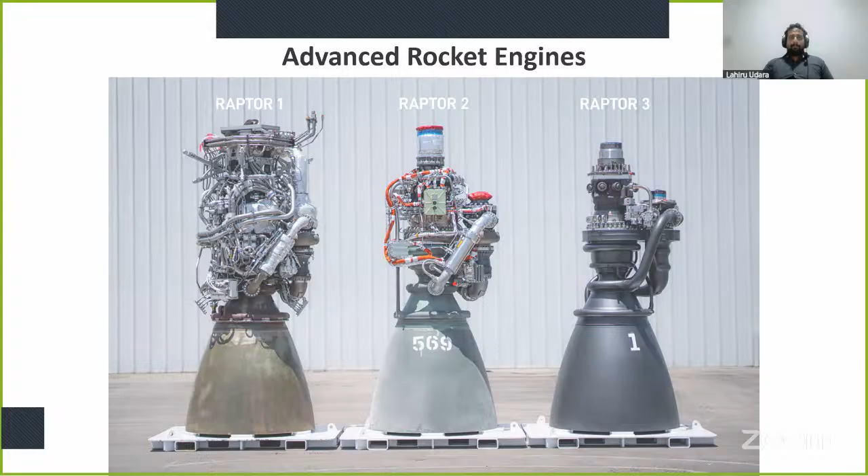But that is not all. SpaceX is not the only company doing advanced rocket engines these days. Stoke Space has also developed a full flow staged combustion liquid methane rocket engine. They called it Zenith. This will be used on the first stage of the Nova rocket.

Then from China, LandSpace company, they have the TQ-12. It is also a full flow staged combustion rocket engine, burns liquid methane and liquid oxygen. It is similar to Raptor.

Then we have the Archimedes rocket engine from Rocket Lab company. It is also running on methane, you can say that, but this one is oxidizer-rich staged combustion, not a full flow staged combustion. And we have the BE-4 rocket engine from Blue Origin - it's also an oxidizer-rich staged combustion rocket engine, which burns liquid methane and liquid oxygen.

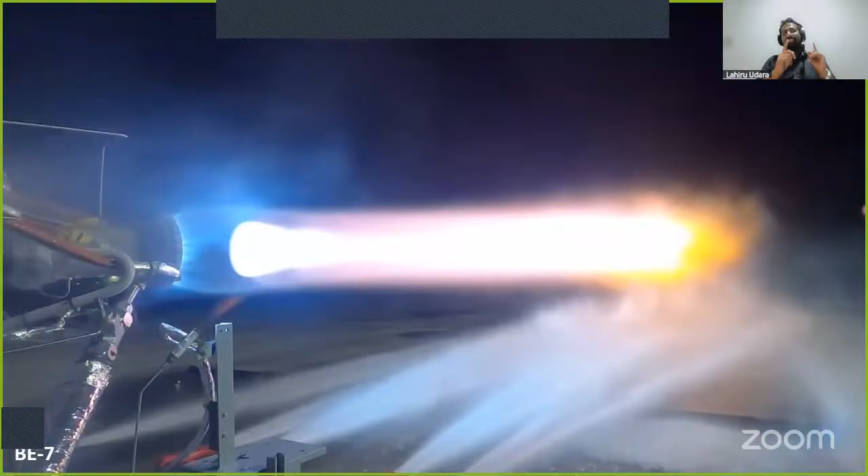Then we have the BE-7 engine. So this is going to be kind of a new rocket engine. This burns hydrogen and oxygen, but in a completely different rocket engine cycle, called the dual expander cycle. I didn't explain the expander cycle because it takes a lot of time, but if you are interested, you can learn about these expander cycles from Wikipedia or the internet.

So this is the new age of the rocket space industry - that is, as we all know, satellite-based high-speed internet and AI computing. Usually internet was spread through the world using fiber optics and cellular towers, but now we have a very special space component - that is satellite-based internet.

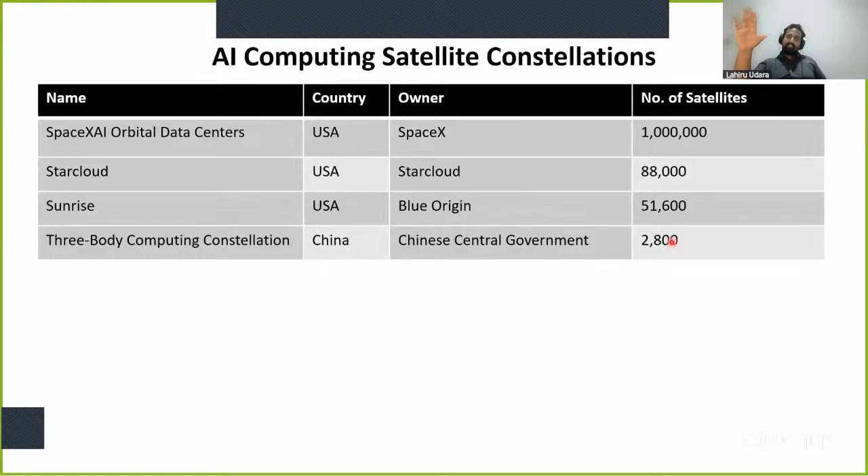So this is the new frontier of the space industry. SpaceX announced that they are sending like a million satellites a few months ago. So this is a very brand new thing.

So that is why this is really good for a data center, because one of the key challenges of data centers on the ground is the amount of energy it needs and the cooling. You need a lot of water, which is not a good thing because water is essential for everyone.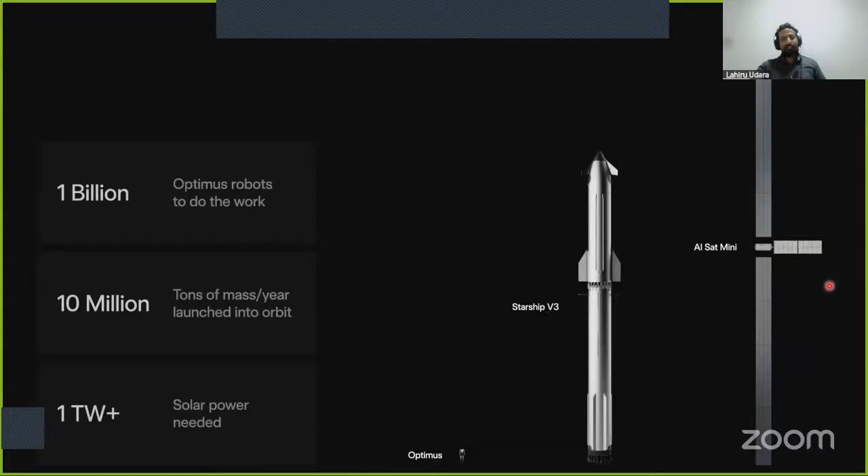Basically, this is a really good solution for the data center issue on the ground. That's why SpaceX is doing this crazy 1 million satellite orbital data center constellation. This design is from a few months ago, and today morning, literally today morning, SpaceX released a completely different design for their satellite. Now the wingspan is not 190 meters; it's now 70 meters.

But the width is increased. So this is the new design, and you can see radiators here and here. Now you have two radiators. This is compared to the Starlink V3 satellite.

These are not in space yet; these are for launching using Starships. This is the Falcon 9 version of the Starlink, the Starlink V2 Mini. Currently, Falcon 9 rockets are used to launch these kinds of satellites to orbit. This is like 1.5 tons each.

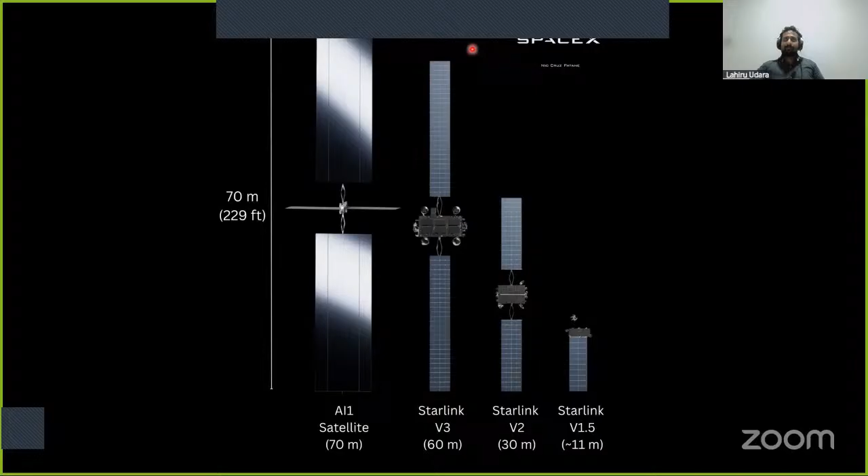So this is Starlink V3. It will be launched using Starship, and I think it's about two tons per satellite. Then they will move on to launching AI satellites using Starship. So 1 million of these, and future versions of this AI satellite, will be orbiting the Earth.

And that's only from SpaceX. We have other competitors too.

More technical details: these satellites have on average 120 kilowatts of computation power. That means these solar panels have to take 120 kilowatts of energy from the sun and convert it to electricity, which is the power used on computers. These radiators have to eject all of that energy as heat back into space. So you take energy from the sun, use it in computers, and the energy converts into heat, and you eject it.

The most challenging thing is the radiators. Let's see how they are going to do that in the near future.

Anyway, SpaceX is pivoting into this new area in the space industry: 1 million satellites in space. This is not everything—this is, I think, 600,000 satellites in the SpaceX constellation, so we need another 400,000 to be added. It's going to be a large number of satellites, and it's going to be very challenging to keep these satellites from hitting each other.

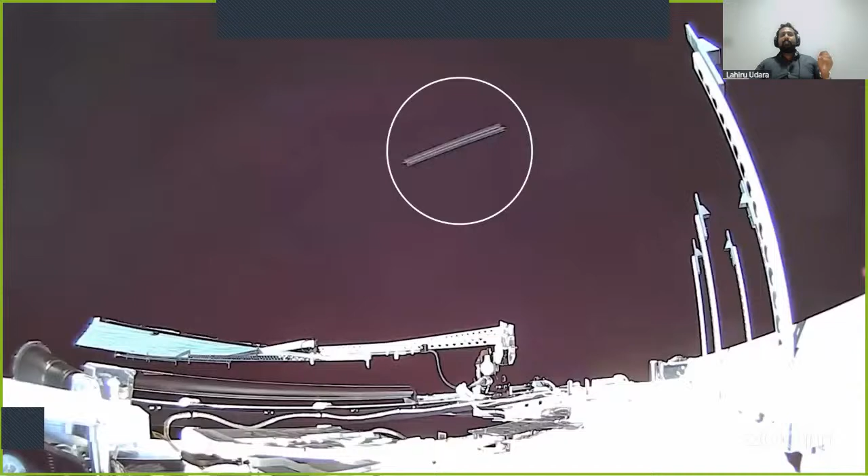For example, these images are from Starlink satellites. These are basically other satellites or some debris flying very close to the Starlink satellite. So here it is one thing, and this is also another thing.

SpaceX has reported some satellite debris coming close to Starlink satellites, in a range of tens of meters—that's very close. They are traveling at orbital velocity, like thousands of kilometers per hour, and passing each other at like 10, 20, 30 meters.

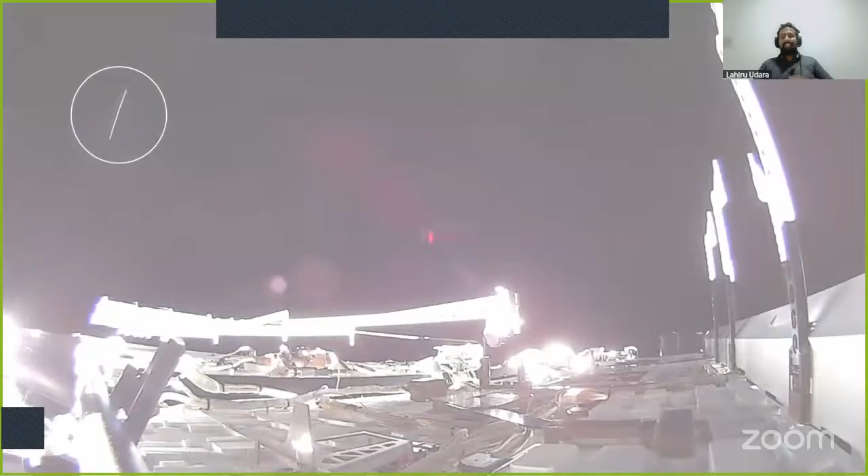That is with 10,000 Starlink satellites. Now imagine we have 1 million SpaceX satellites and 42,000 more Starlink satellites, 200,000 satellites from China. Then we have all these other Star Cloud, TeraWave, and other satellites—maybe 1.5 million, maybe 2 million satellites in space. It's going to be like a real traffic jam in space.

Before we move on from AI, I just want to emphasize that the AI industry is going to be the dominant industry in space in the future. For example, SpaceX is, as usual, taking the first step. They are going to make the company public, transitioning from private to public.

Before that, they acquired XAI, Elon Musk's other company, where we have X, Grok, and other AI services. You know that, right? So XAI was acquired by SpaceX. The new name is SpaceX AI. That's the name I used for the orbital data center.

This was done in February, and a few weeks ago, Google signed a deal with SpaceX AI to use their computing hardware and data centers, paying nearly $1 billion per month to SpaceX. And Anthropic, who have Claude AI, will pay $1.25 billion per month for using SpaceX data centers.

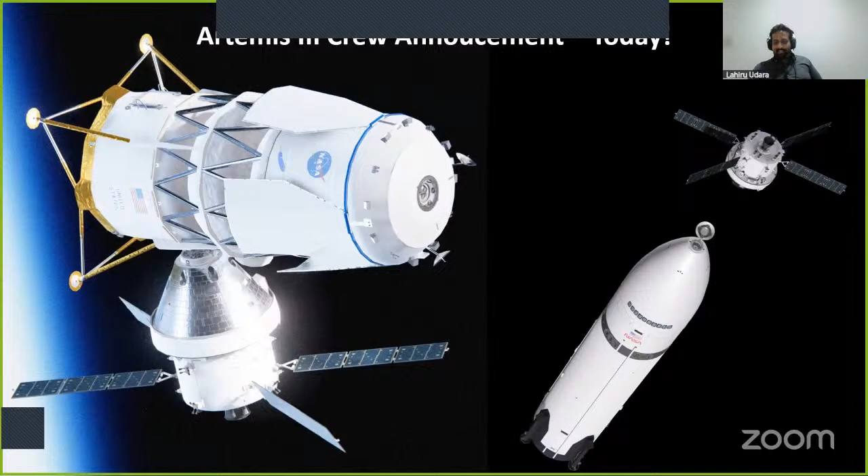Today is an exciting day because, okay, what's the time now? At around 9:30 p.m. today, I think in about 30 minutes or so, NASA will announce the Artemis 3 crew, who are going to be flying on the Artemis 3 mission next year.

So Artemis 3 is not going to the moon. It's a low Earth orbit mission. The goal is basically to test lunar landers in low Earth orbit. In the Artemis program we have two lunar landers: the Lunar Starship from SpaceX and the Blue Moon Mark II from Blue Origin.

Both providers, SpaceX and Blue Origin, are required to launch their lunar landers into low Earth orbit next year, and the Artemis 3 crew will rendezvous and dock with each lander in their Orion spacecraft. So this is not going to be a lunar mission, but it is very crucial for the next Artemis 4 mission, where humans will land on the moon again after five decades.

For the Artemis 4 mission, they will use the Lunar Starship as the lander. Artemis 5 might also use the Lunar Starship or Blue Moon Mark II, because NASA is going with this two-provider approach. They have two providers for ISS cargo, two providers for ISS crew missions, and now two providers for lunar landers. Having two providers lets them minimize risk and maintain good competition between companies in America. That's a good thing.

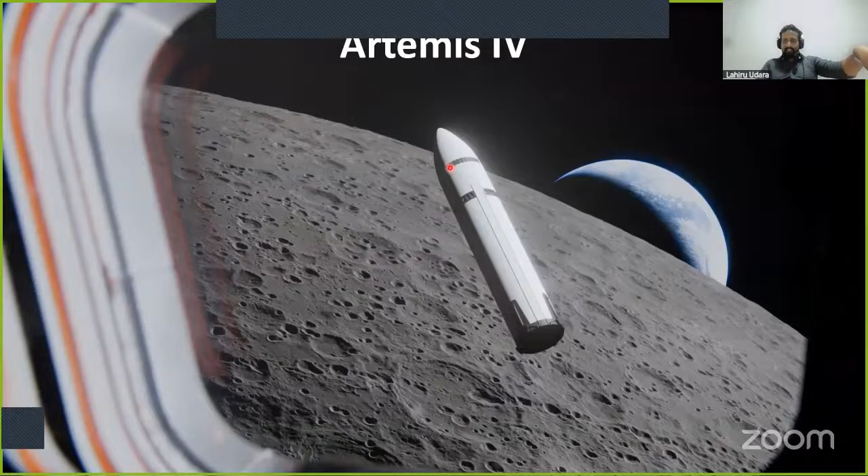So with Artemis 4, 5, 6, there will be lunar landings on the moon. But the end goal of NASA is basically to build a lunar base on the moon. It's kind of a science fiction area right now. NASA revealed these plans a few weeks ago.

They expect a semi-permanent crew presence on the moon, in a moon base, by 2032. That's only 6 years from now, a very short period of time. The first base effort is happening right now — they are sending 3 spacecraft to the moon with rovers and other equipment to find out the best place to build a lunar base.

The area they are targeting is the South Pole, because the South Pole of the moon has a lot of craters with permanently shadowed places, so there's water ice. If you have water ice, you can get water, you can make rocket propellants, and you can sustain life to a certain level using water. So this is their moon base phase 1 targets.

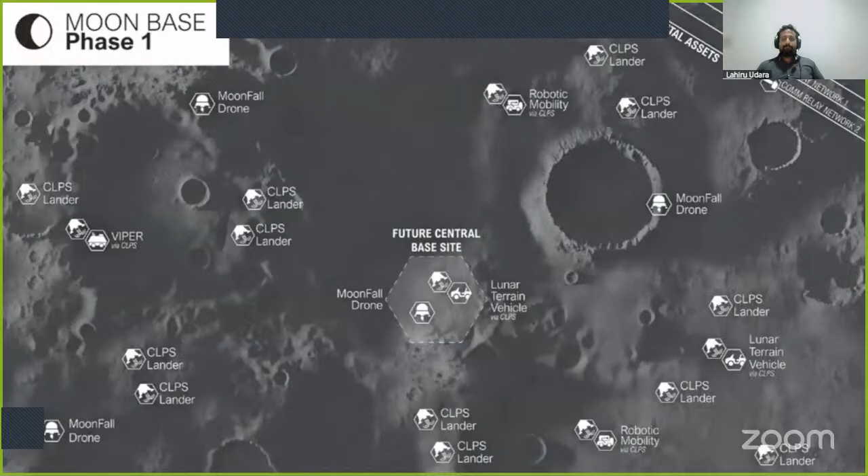CLPS landers means Commercial Lunar Payload Services, where American private companies send their lunar landers to the moon per NASA contracts. Viper is a rover, Moonfall is a drone. There are a lot of things going to happen in the near future. This year, we have 3 American spacecraft slated to go to the moon.

The first one is Blue Origin's Blue Moon Mark 1 lunar lander. The Mark 2 is the bigger one, which can carry humans. This is an unmanned lander, and it's basically done now. They are testing it, but the bad thing is the rocket exploded.

If you saw the news a few weeks ago, Blue Origin's New Glenn rocket exploded. That rocket was going to be used for this launch, but now the launch pad is destroyed, and the accident investigation is underway. So Blue Origin has to find a new rocket to send their already completed lunar lander to the moon.

Then we have the Astrobotic company sending their Griffin lander, and Intuitive Machines has their Nova-C Trinity lander. So all 3 of these landers are slated to launch and land on the moon this year. This is considered phase 1 of the moon base.

Then we have the lunar drone program. That's basically sending small landers to the moon, and from there it flies over a certain area, photographing and mapping what's down there. Because in order to make a lunar base, you need to be certain that you have water ice nearby and some other things, so drones are used to characterize the land.

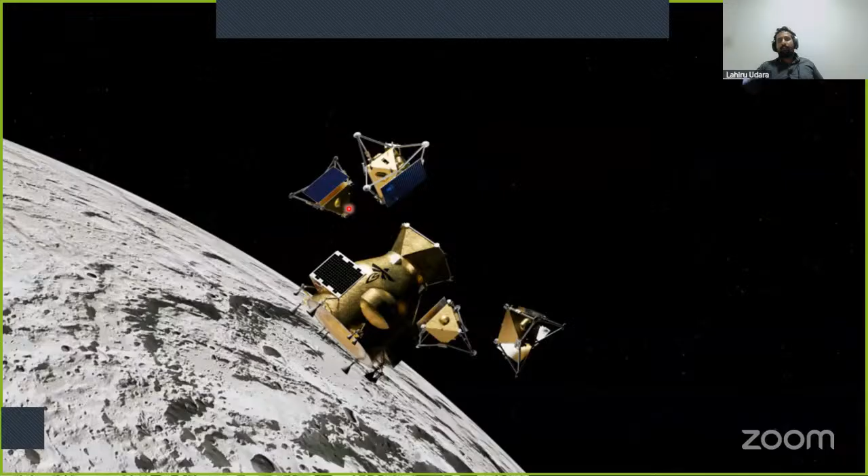So that's why these 5 kilometer range drones are sent to the moon. Currently, Firefly Aerospace got the first contract to build and launch 4 lunar drones in the coming years.

But America is not the only country trying to go to the moon right now. All these American efforts are because they always wanted to go back to the moon since President George W. Bush back in the early 2000s. But now China is also trying to send humans to the moon, so the Americans are doubling down their efforts to go back to the moon before China does.

China is trying to use a simpler, less complex way to send humans back to the moon. America is basically trying to use the Orion spacecraft with the much more complex Starship and Blue Moon Mark II lander, but China is going with a simple Apollo-style architecture.

So you have a mothership called the Mengzhou, then you have the lunar lander called the Lanyue. They are not building a Saturn V class big rocket; instead they are building two Falcon Heavy class rockets called Long March 10, which is much easier. They use two rockets to launch Mengzhou and the lander to the moon, and in lunar orbit they dock.

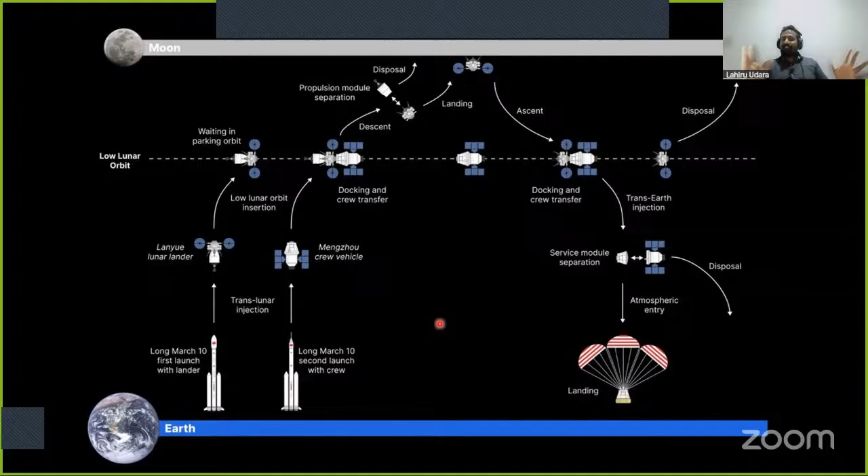So China is taking a shortcut, launching two spacecraft on two smaller rockets. This is not just some plans they have; they have already tested their Long March 10 prototype with the Mengzhou spacecraft on top.

Also, they tried to land the first stage of this rocket onto the ocean, with a ship in the background. Next time they are trying to land this booster onto the ship. You remember the Starship first stage uses the two big Mechazilla robo arms to catch it. Here they are using a cable technique to catch the first stage with the ship.

So the ship will land, and there are some cables that will grab the first stage instead of a hand like in Starship. So they are trying to use reusable rockets to send a classic capsule and a classic lunar lander to the moon.